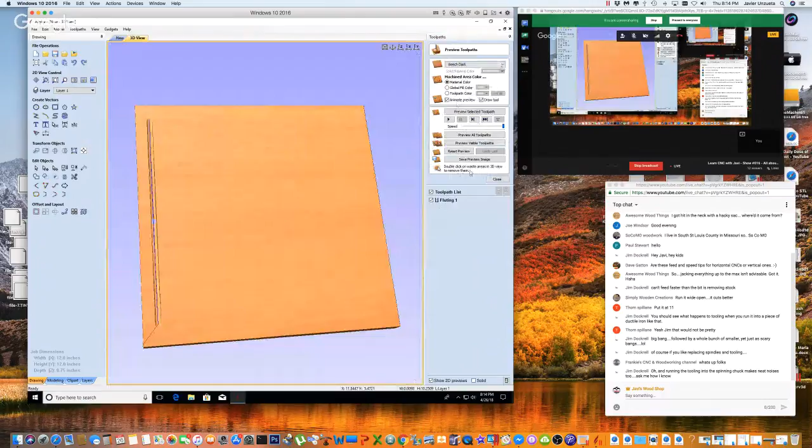The first one we'll edit, and we'll do feed rate of 10 inches per minute. And by the way, plunge depths also come into play. And then calculate. We'll do the same thing with the second one now. This is a little tedious, but you get the idea.

In the end, what you're going to have, well, let me do the second one, and then I'll just duplicate for the rest of them just to save some time here. Go to the fluting toolpath, just hit calculate. It's the same fluting. And then on this one, choose it and go a little faster. Say the feed rate is now 50.

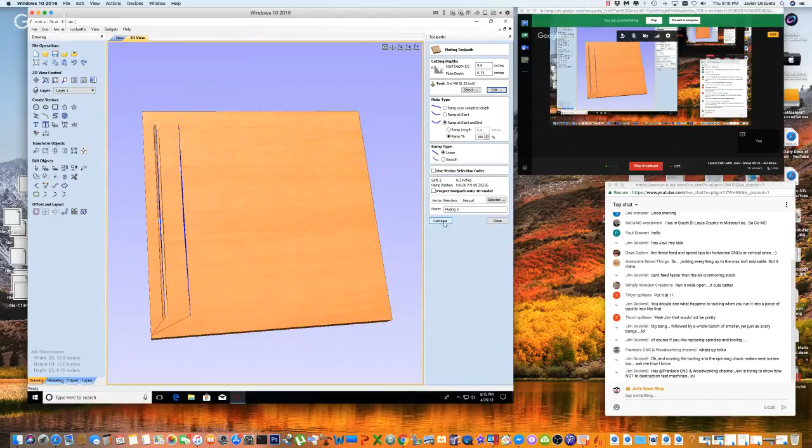I like to do increments of 10, 20, 30, 50, 100, 120. Do 400 if you like. Whatever floats your boat. This is strictly a test. And in the end, you're going to see a bunch of lines like this. This is a sample of a 12 by 12 piece. You could put the lines closer together, whatever the case may be.

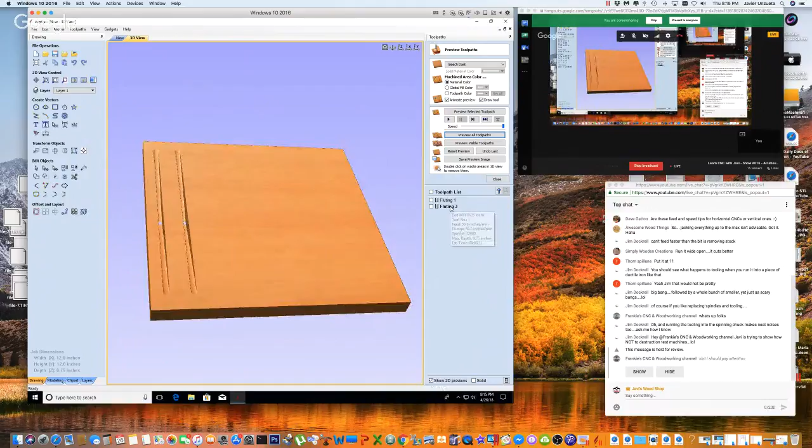Let me quickly just show you what the end result will look like. So in the end, you're going to do 10 of these tool paths and run them all together because it's going to be the same bit. And you're going to end up with something that looks like this. Now, it's not going to be this nice and smooth.

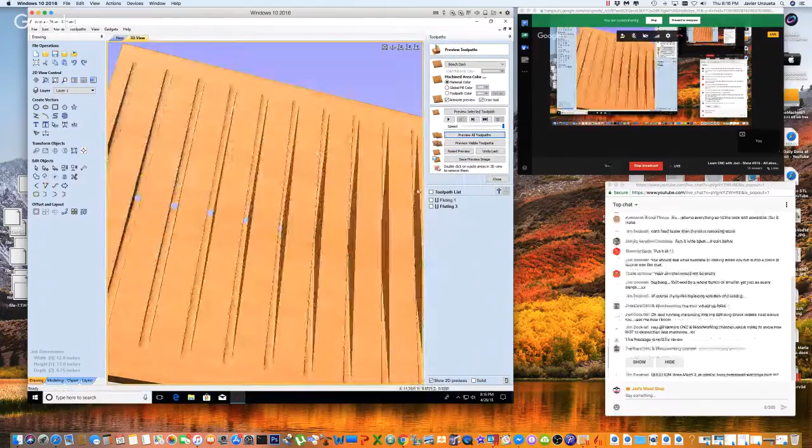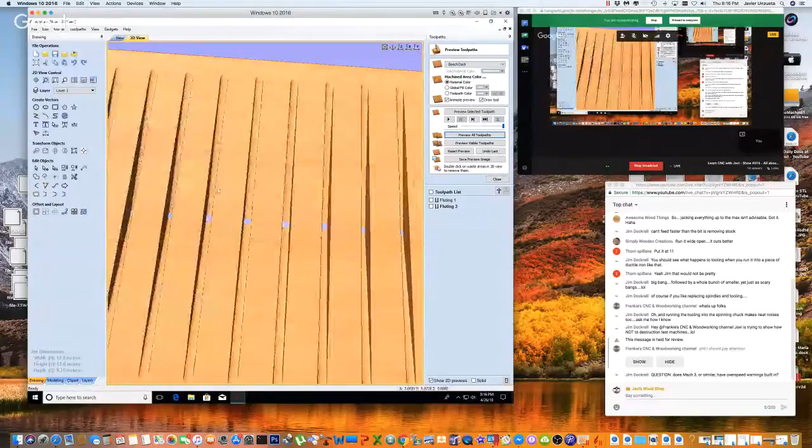You'll see when it's really, really fast, you're going to see a bunch of tear out over here, depending on what you use. If you're using melamine, you're barely going to see a difference because with melamine, if you've got a sharp bit, at any speed it shouldn't tear out. If you're cutting with plywood, you will definitely see a difference. And at the end, you label your thing, you put 10, 20, 30, 50, 80, 100, 120, 200, 300, 500, whatever the case may be.

Let me catch up on the thing here. I'm reading up on the chat, as you can see, following along with the cursor. Yeah, if you like replacing spindles, that's definitely the way to go, to run it at full bore. And so anyway, so that being said,

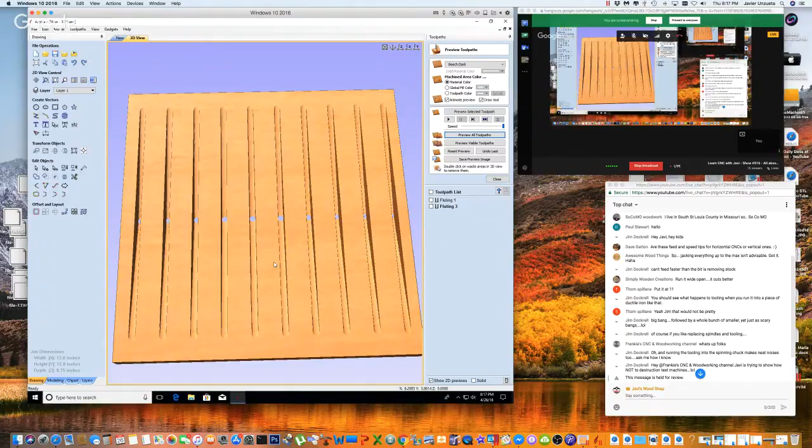there's your test pattern. It's a nice, simple test pattern to do. Now, does anybody, while I'm here, have any questions on feeds and speeds? Any general questions? This will give you a general idea. This little board, replace the board with a small piece of cherry, of poplar, of plywood, of whatever you're using for your projects. Take a small piece, create this as needed.

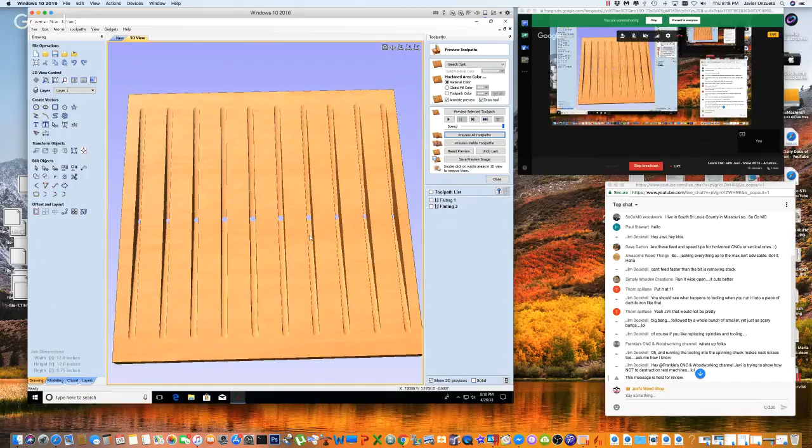I'm currently using a 1/4-inch bit because if you're cutting with plywood and you want to get nice clean cuts, like I'll use Dave Gatton as an example. When he's cutting on his CNCs, he wants to know the maximum speed that he can possibly use to get a super clean cut while not having to waste a bunch of time on cutting the parts. Well, this is one way to go at it. Take your 1/4-inch bit, run it at different speeds, and you can see if there's any tear out.

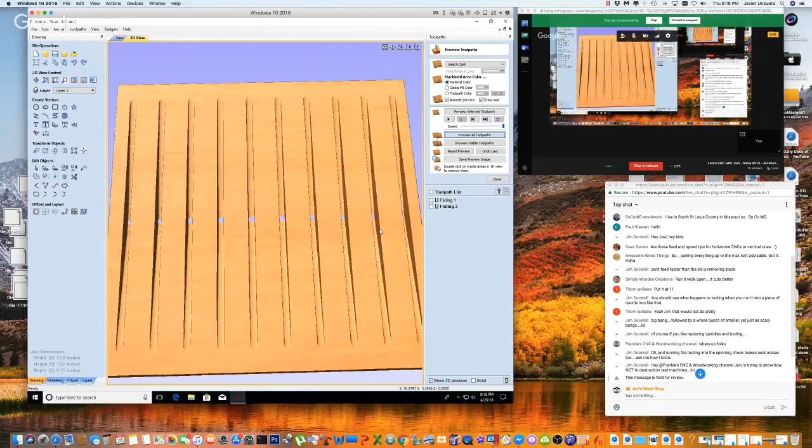If you find that at 200 inches per minute, the bit is the spiral bit. Yeah, that's short for spiral bit, spit. The spiral bit is going real quickly, then by all means run it at full speed. But keep in mind, you're taxing your machine, but you are saving time, and time is money.

With this particular project, you can use V-bits. I mean, any bit you have, bullnose, roundovers. Roundover bits. You use V-bits. You use dish cutters, even surface cutting bits. Although I wouldn't run those past 1/10 of an inch. If it's a 1.5 inch thick blade and you want to see how fast a surface cutter cuts, don't go past 1/10 of an inch, or 30 or 40 inches per minute.

Unless you have one heck of a very powerful machine and feel like breaking bits. That's another thing that can happen. I've mentioned a number of things that can happen if you go too slow. One of the things that can happen is you're creating so much force on the actual wood that you can actually chip a blade. Likewise, if you go too fast, you can end up chipping a blade. Although that says more about the quality of the blade than anything else.